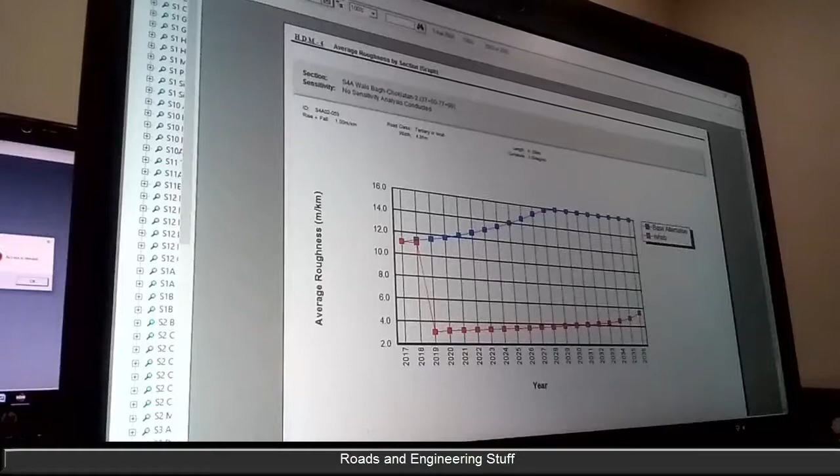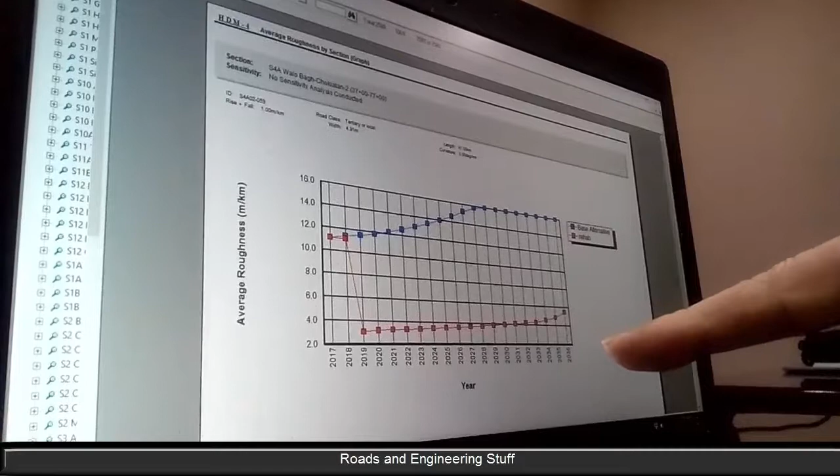But even if you've got consultants doing it for you, you need to know. You don't need to know how to do it, but you need to know the concept. And if the consultant's doing it for you, they've got to give you these graphs, so you can check whether it's accurate or not. So that's the graph which tells you whether it's performing the way that you expect it to perform.

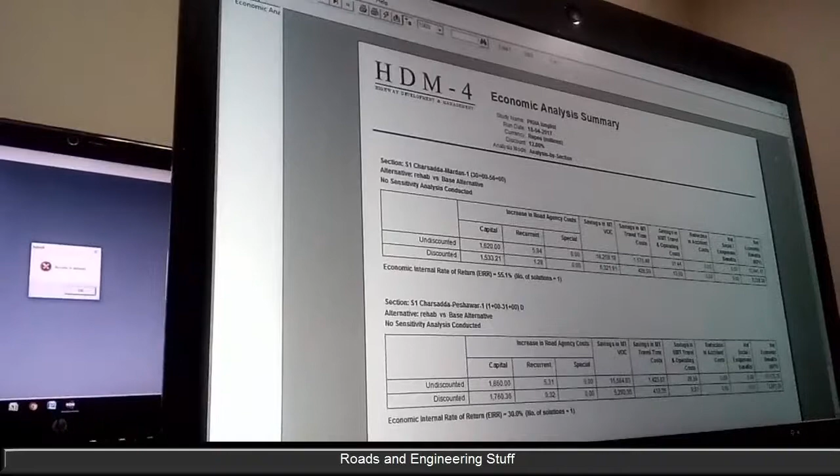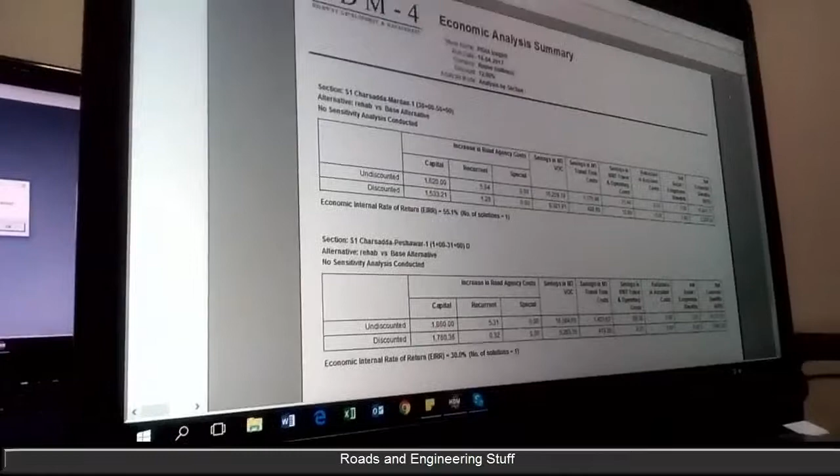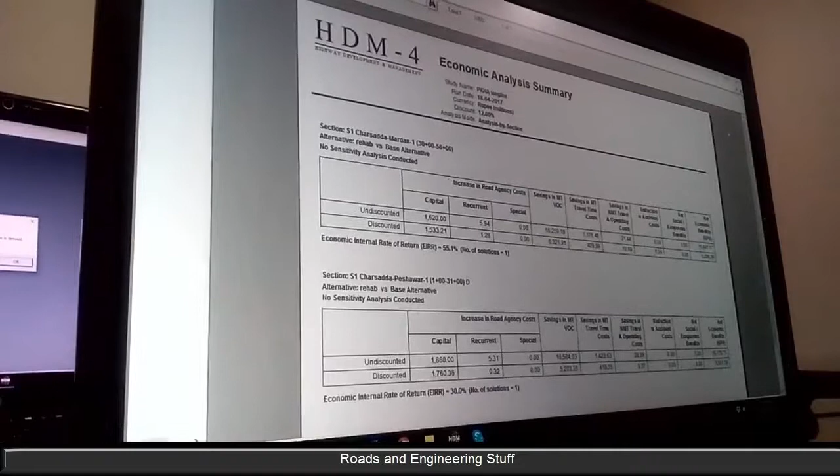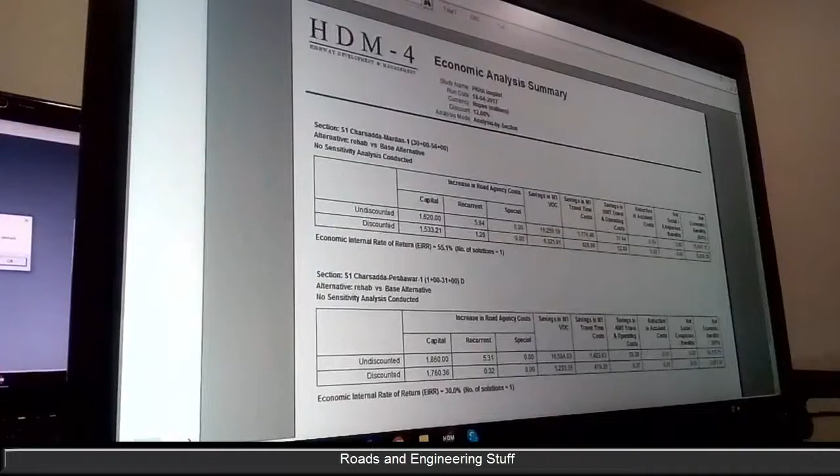And the other key output is the economic analysis. This is just a summary, but it tells you what sort of rate of return you're getting. So this is what you're finally looking for, and it's comparing doing the intervention, which was rehabilitation, with just doing ordinary maintenance. Now, that's quite high, but the way I've set it up, it's probably okay. I think these are all okay.

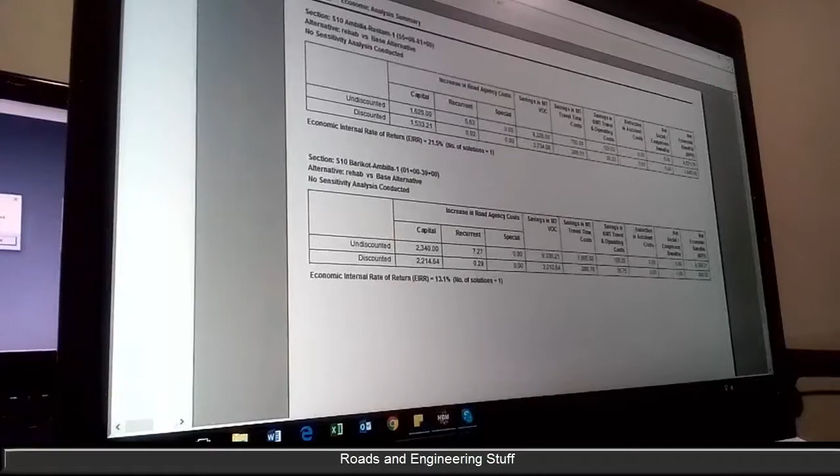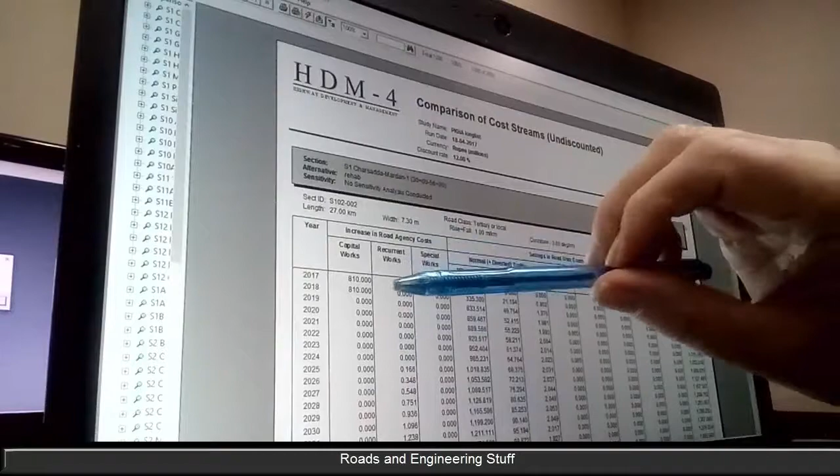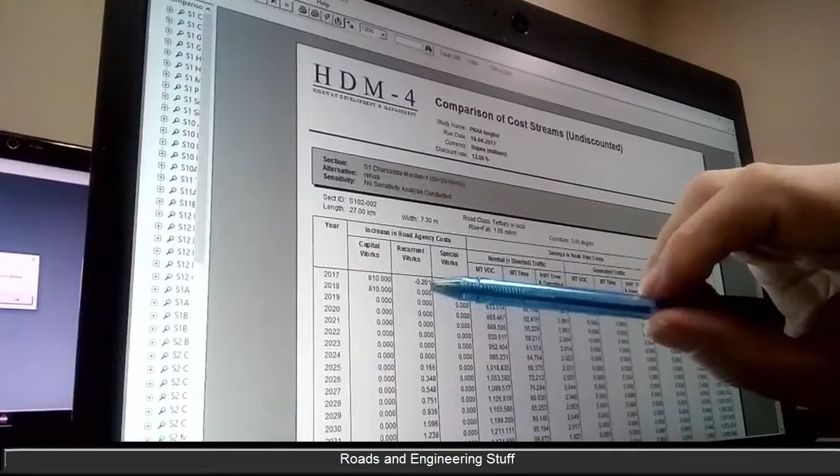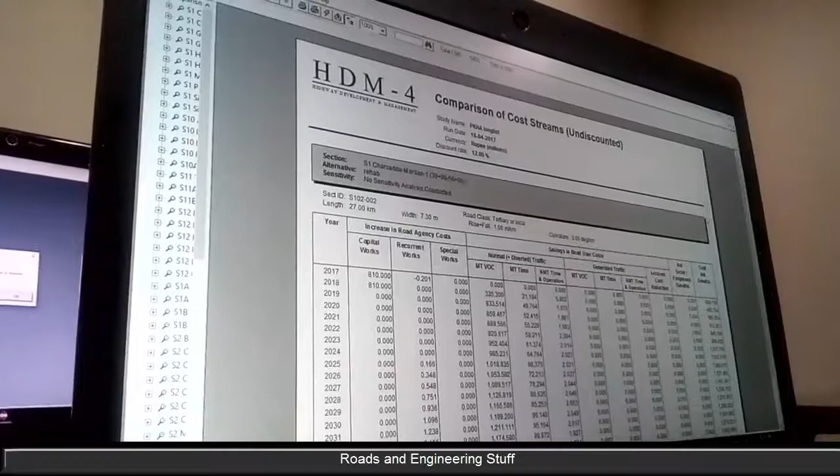But if you got figures coming out here that look strange, then you can go up to this one here, which is a comparison of the cost streams, and you can see what's happening. Here's your capital cost initially, and these costs are actually declining. This is your recurrent maintenance cost. So that's your capital cost, those are your maintenance costs, these are the savings in road user costs, and this is the total. This was for Charsadda-Mardan Road.

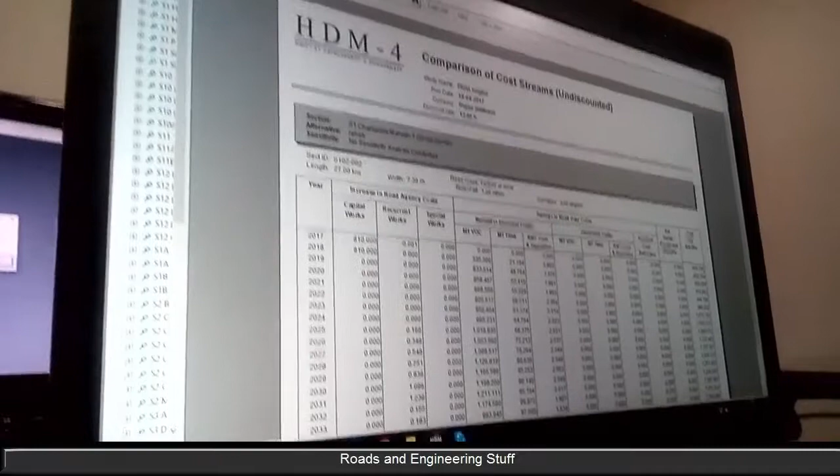Can you show the environmental effects? What does it show? Emissions by vehicles, emissions by net annual change. Emissions analysis wasn't selected, but okay, let's just look at that. So if you're interested in carbon dioxide and all the rest of it, then this gives you that information. Okay, that's good, so you can generate that.

We have a part on environmental assessment, so maybe they can generate this data and put it in the environmental plan. It doesn't tell you how many shearwaters are deprived of habitat, but it does tell you what the carbon dioxide is. We are a client. When we generate the TOR to the consultant to do the following job through HDM4,

what should we write into the TOR for the consultant, and what should they do? Like IRI, I understand. Whatever assessment of cost, what cost effect it will be, what will be the maintenance, as per HDM4. It is a very long software.

If I was writing a terms of reference, I would include effectively a calibration step. What is the calibration step? It says that they should ensure that the results from HDM4 are consistent with the experience in the local conditions, in terms of road deterioration. But who will ensure it?

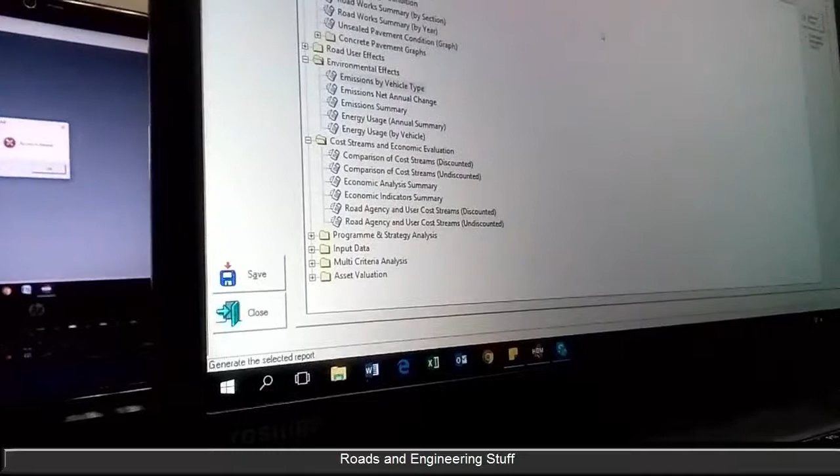Who will ensure that it is the actual condition or it is calibrated? Well, you'd be looking for a report from the consultant, and the consultant report would be: we tested these activities. It's not a very long report, 10, 15 pages. These things we tested, and this is what the chief engineer said. This was right or wrong or whatever.

happened. If you haven't got history, then you have to rely on people's experience, and you have to show engineers that's sensible. You've got to do that step, and nobody does. I tell you, nobody does that. There is a reason for it.

So you just gave us the overview of the HDM4, but is it enough for today or not? I think it's more than enough for today. It depends whether we need a second session or not. If you work on it, learn something by yourself, then we may need a second.

So what are the recommended books? I've already got the books, downloaded them. I just want to ask you, David, what is the recommended input data? What are the recommended books related to HDM4? There is a help in it. You can search for individual help topics. Yeah, but I asked the expert, because I've searched for it, that's why I'm telling you.

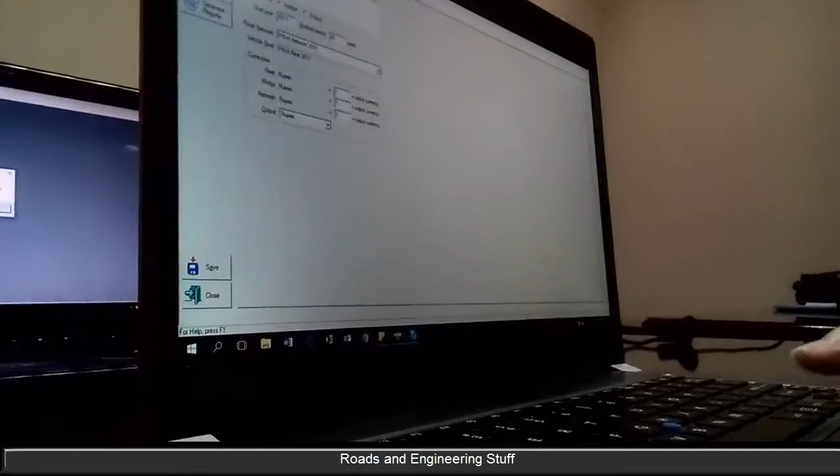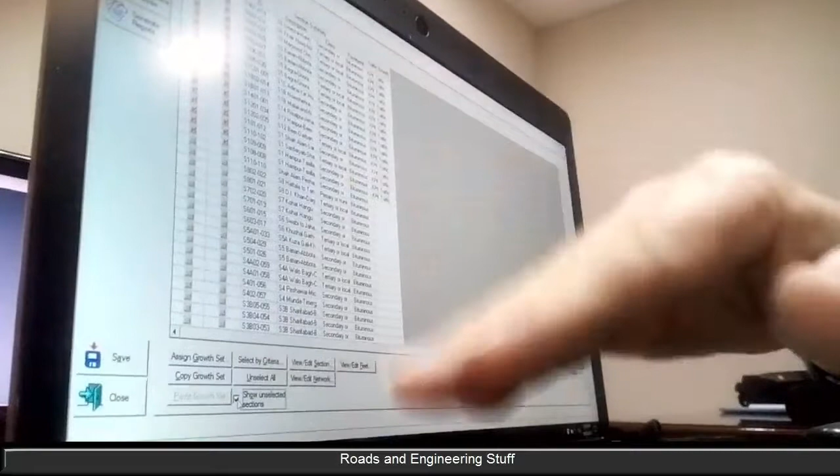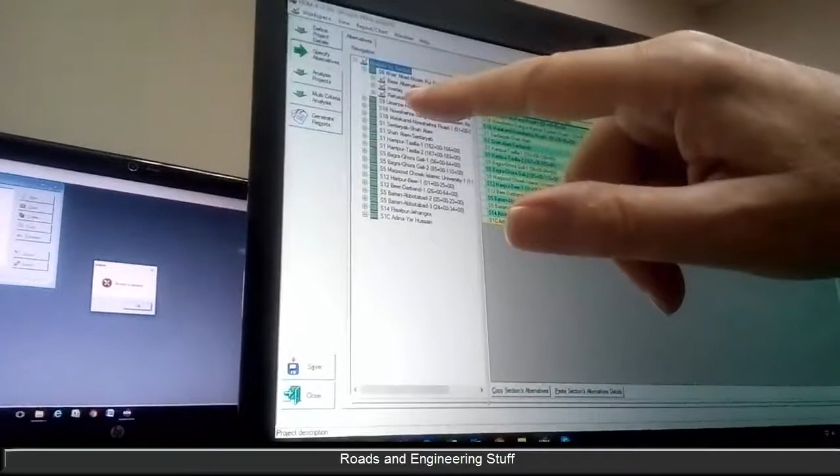This is what I've called the PKHA project, right? And in this one, I've only got the sections that relate to the project roads. All the rest are actually there, but they're not ticked. And the study alternatives, I'm not very far along the line yet. I've just set it up here. I've set these up with the base alternative, an overlay, or rehabilitation, right?

Let me just run it again. I'm still playing with this one, and it's still doing some funny things which I don't understand here. If you understood everything that a model produced, there wouldn't be any point in having a model, would there? It's got to come up with some things that you don't understand. Otherwise, there's no point in having it.

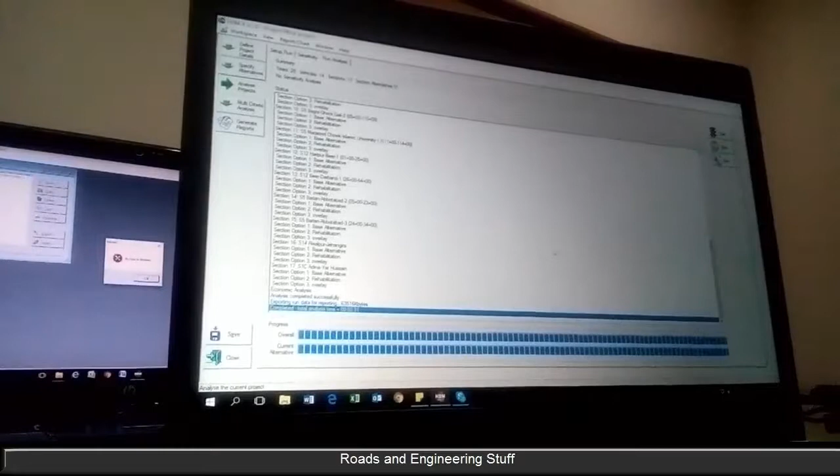Before this presentation, I just knew the name of the HDM4 software. But now after that lecture, I am aware of what input data is required, and up to analysis, even generating the report. So in one class and 1 hour, a lot of things I learned from you today.

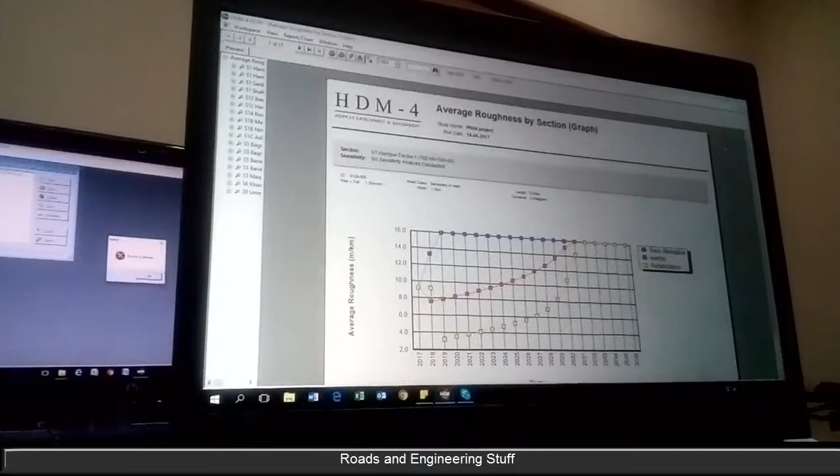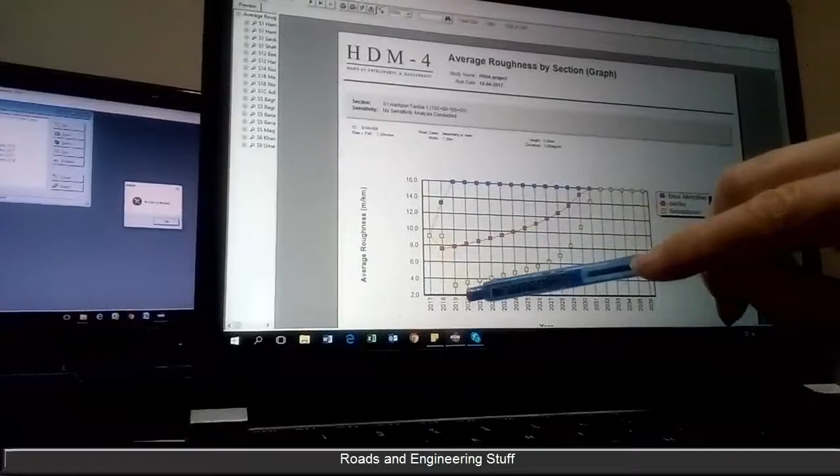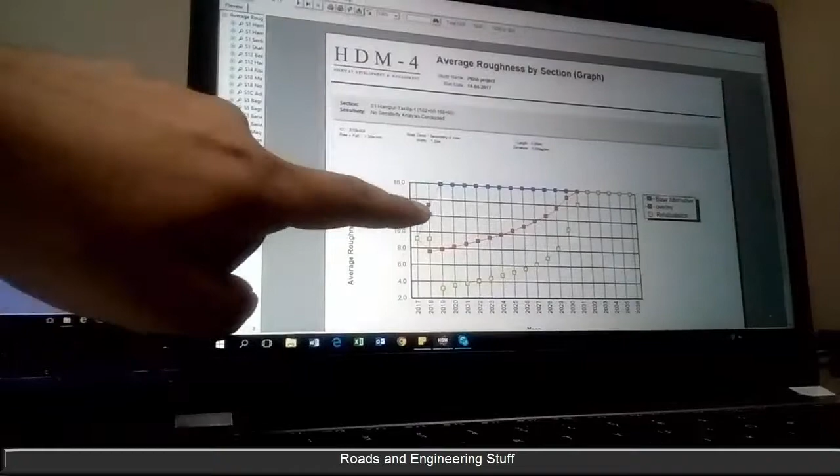So you can see, this is the sort of picture you get. This is overlay and improved. This is an overlay, and that's rebuilding it by providing a rehabilitation component. It should be above the... No, sorry, it's reducing the IRI. So it's okay. So IRI is coming up to 1 to 2.

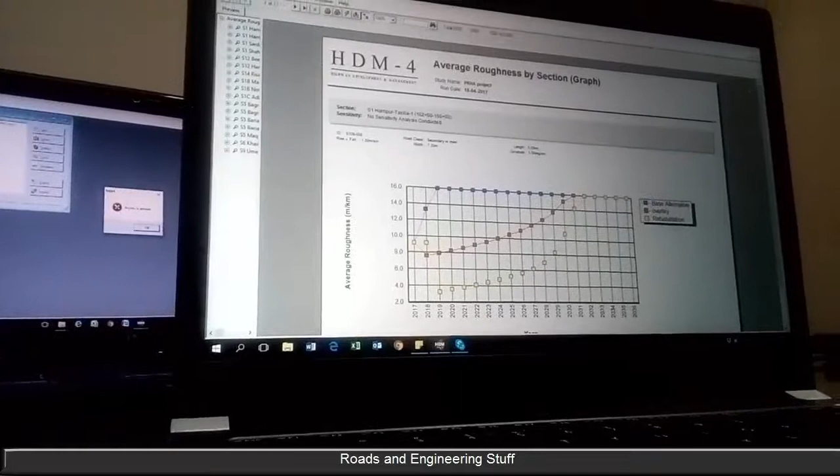It's increased. So I think about the serviceability index. The figure is just like that one. Serviceability index, and then it is reduced down. After the rehabilitation component, it will once again increase.

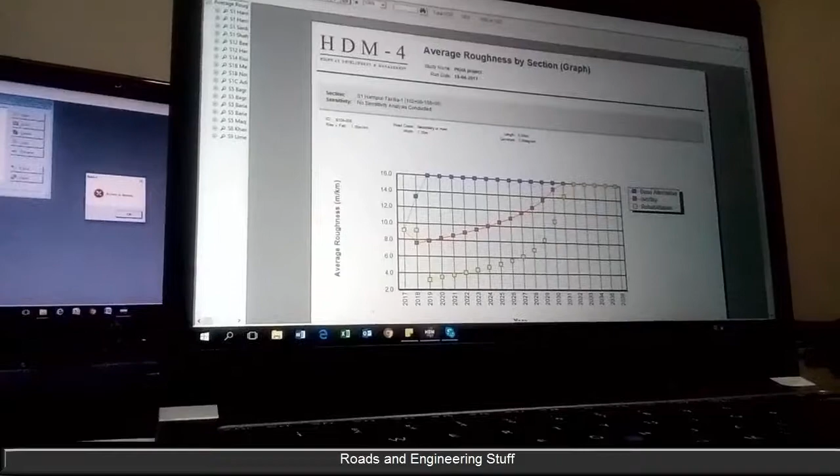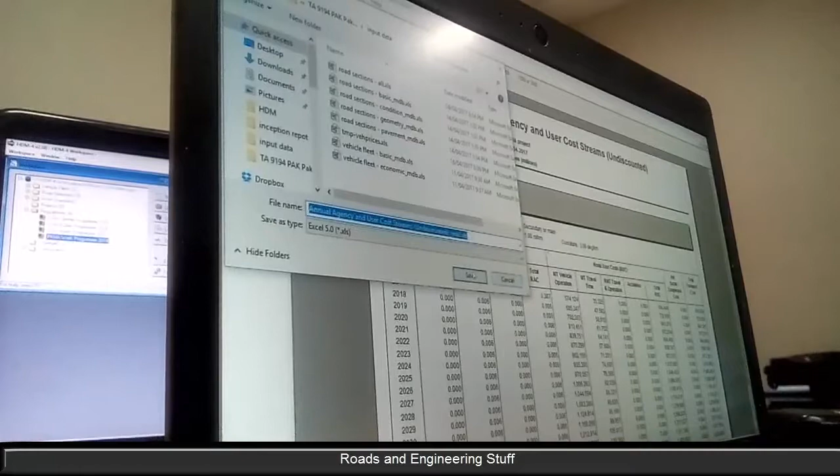Is this one here? No, this one. Sorry, they're similar but different. This one here, which has many columns. Now, how do I use that? Well, you have to export it, and the only way you can export it is to what it calls Excel 5. And I'll export it there. Okay, that's fine. Now, let's go to that file.

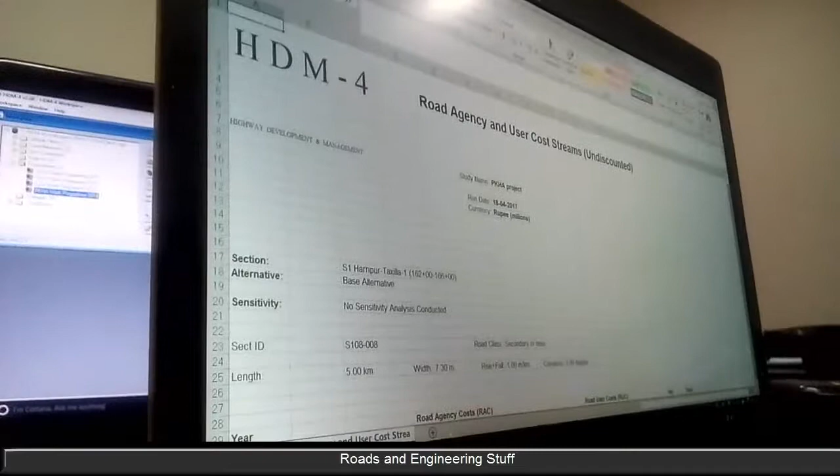That file there. And it always does that, I don't know why, but anyway. Now, look at this. So here's all the data, right? Here's all the output, but it's in every second row, and there's a gap here, and the headings don't correspond with the columns.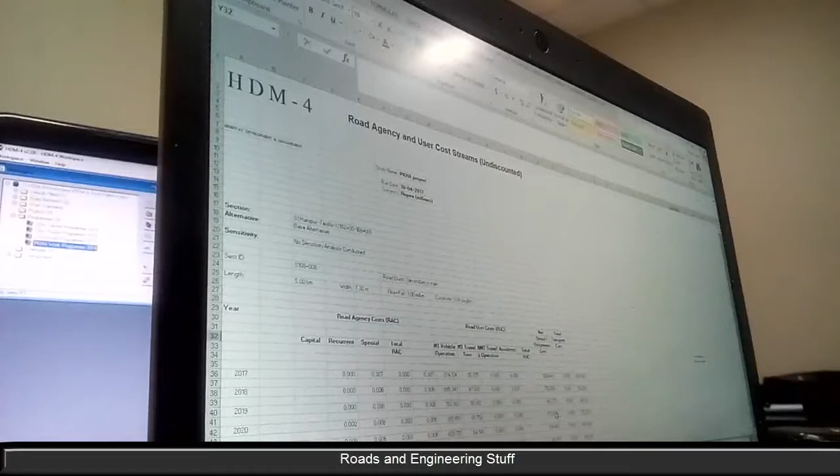So you can bring it in. It's a mess. It's a total and utter mess. I mean, you can use it. Of course, I do. But you actually have to do some clever manipulation to get this. Why can't it just be a nice simple Excel spreadsheet?

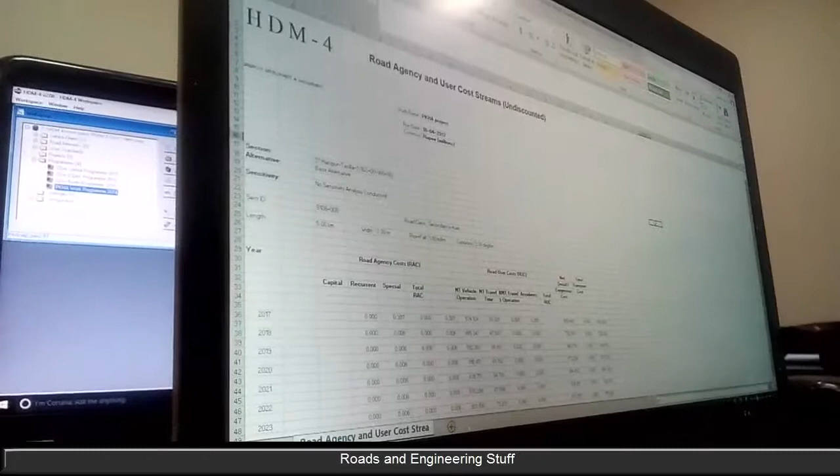Yeah, because we have a lot of sheets over here. If we want to bring it to the Excel sheet, then we will be confused, and we can even make a blunder over here, because from one column data we can put to another one. So HDM4 is a very sophisticated program, but small blunders are also possible. So that's okay. Then what are the other things?

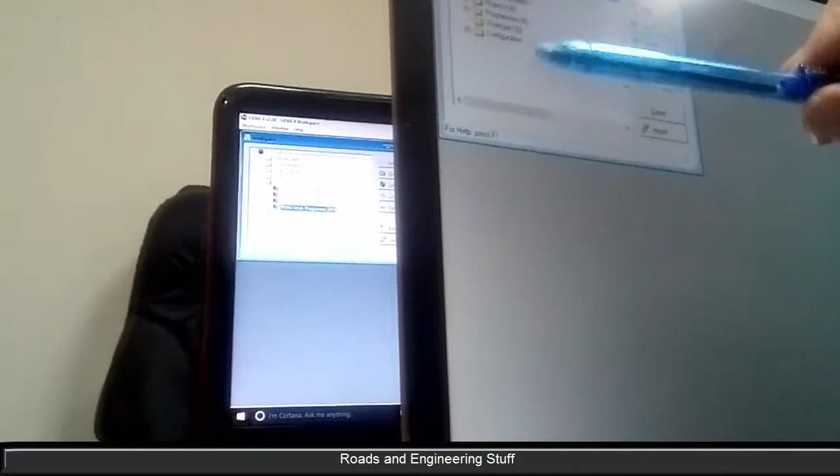The interface initially is just like the main MS Word interface. This is the main interface that we were working from. So this is where you define your vehicle fleet, you define your road network, you define your work standards, you run the programs or projects or strategies. These are the inputs. Vehicle fleet, road network, work standards. Those three are the inputs.

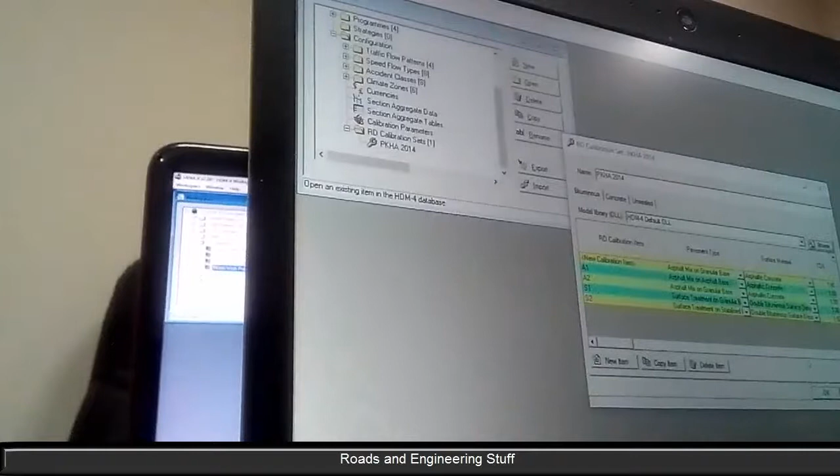Okay. Now the calibration. These are the calibrations, which nobody spends any time over, and yet they're very, very important. So this is PKHA 2014. Open that. Now you've got different calibration factors for different things,

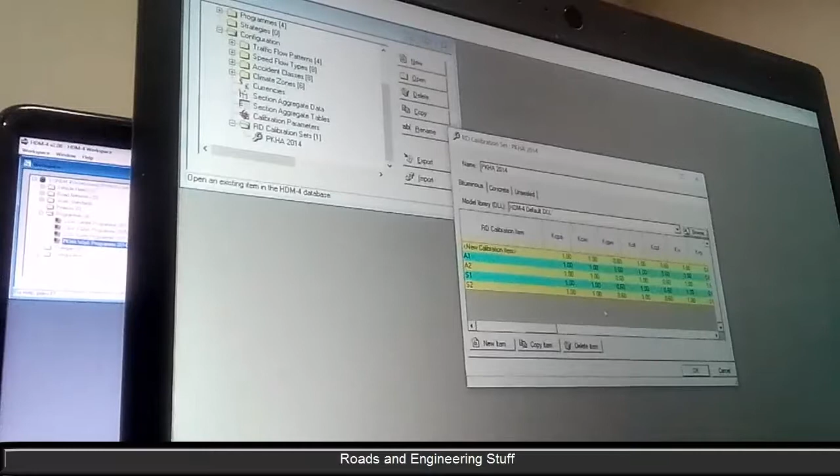and one of the reasons why nobody does anything with them is that it's very hard to find what all these things are. But if you look over here, I can't remember what they are individually, but these ones are the initiation and then the rate at which cracking occurs, potholing occurs, raveling occurs, and so forth. And I've set these all at 0.6. So I've already brought that slope down.

Your colleague was saying the slope's too high. I've already brought it down by multiplying it by 0.6. I can bring it down even further if that's needed. So this is how you do it.

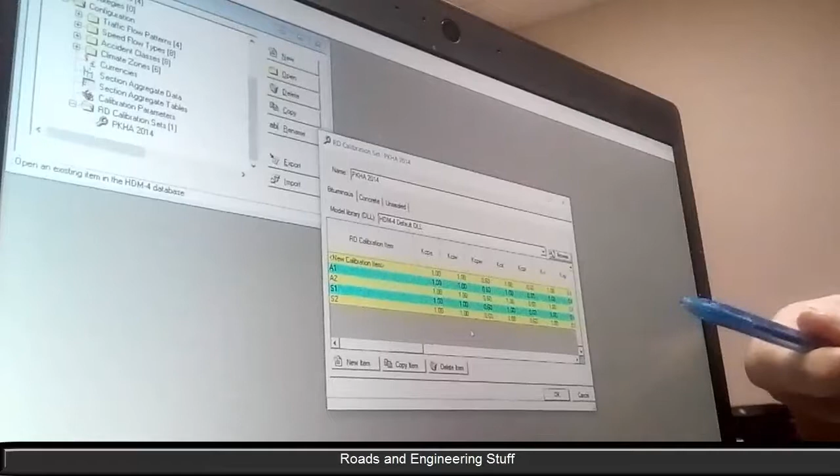When you look at the effect, you run that diagram showing what the deterioration rate then is, and then you say that's too high. Okay, we'll change that, and you just keep on changing this parameter until you're happy with the rate of deterioration. If the judge is not an expert, you can also have a lot of mistakes in that one. Well, I think it's better to be used by the expert. It's better to be wrong but have it close than just to accept.

In your case, it's worth spending time on trying to. But in Pakistan, a wrongdoing is a blunder, and nobody will save you from that blunder. Nobody looks at these. So if you get these wrong, nobody's going to know. But if an expert comes... I've seen other people's work, and I've rarely seen anybody have anything other than ones in all those things. People do not touch these things.

But it will definitely affect our results. I think it's critical. I asked the question that if there is any small mistake in these factors or any input data, it will ultimately affect the rehabilitation strategy, overlay, or a lot of things. So at the end, the road will be deteriorated, or the required IRI will not be achieved. So that's my question. Well, the thing is that in these you can only do your best,